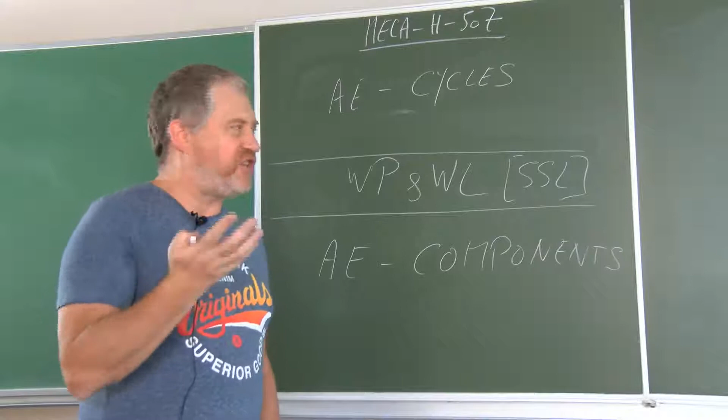That's why we can say we will discuss 3 parts, but this one will be very short, about 1 day, 1 afternoon. The other ones, globally speaking, in terms of the ratio of half days we will have: 6 about the cycles, 1 about the helicopter view, the steady state line theory, and 6 about the components.

Because I know students are quite interested by exams, marks, points - in fact it will be very similar to one afternoon: the exam. In an afternoon we have a part on theory and a part on exercises. The exam will be the same, so it will be 50-50, 1 or 2 or 3 exercises on paper that you deliver at the end.

This year I don't know exactly how it will be organized, if it will be in a room or online. You receive an exercise with some figures, some tables, some data, and you solve it and deliver your sheet at the end. This is the exercise part, over 10 points.

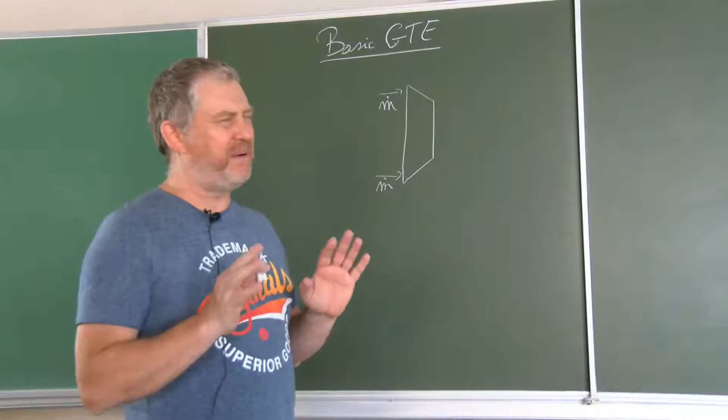Related with this pressure, temperature, and speed, there is also a mass flow rate, m dot, dm over dt, which is in kilograms per second. We will rarely speak in volumetric flow rate, because what's important is the mass. Rho will change a lot, so you know mass flow rate equals rho VA, and rho can really change a lot in an aircraft engine, in the compressor, the turbine, the combustion chamber. So we always speak in m dot, the mass flow rate.

How can you have a large energy flow? There are different ways. You can store energy using compressed air. This is certainly a solution, but how can you use that in a continuous way? This is impossible, because the tank where you are putting the compressed air would become empty very quickly. So it's not possible. The only continuous way to proceed is to have a combustion chamber.

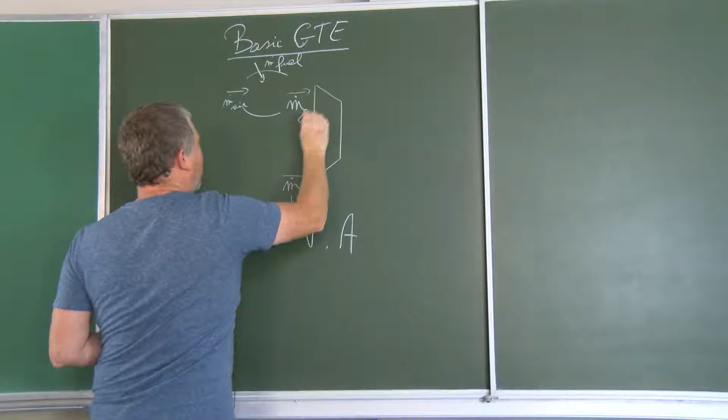Combustion chamber, I'm representing that like this. Today, we will, in the study of the components, really analyze combustion chambers. We will analyze this combustion chamber in the last detail later on. But for today, let's just represent a combustion chamber like a tube, a cylindrical tube where at the entrance we have air, so m dot air. We are injecting m dot fuel, and here we have m dot gas. Thanks to the combustion that we will have there, the temperature will increase a lot.

You hope that the total pressure will not decrease too much, so you keep a very high energy flow. The problem is, if you want to realize a combustion, burning a fuel together with air, especially in an open combustion chamber like this one, it's very different compared with an internal combustion engine. In the cylinder of an internal combustion engine, you have a very small volume, everything is closed, so it's quite easy to realize a combustion. Here, you have a flow at high speed entering and leaving, and you need to realize combustion. It's very complicated. We will see how it can be solved, but it will be a real challenge.

How can you ensure that you will have a good combustion? We will see later on what we call a good combustion. This is by having the right conditions at the entrance. You must have the adequate speed, the adequate temperature, and mainly the adequate pressure. We will reduce the speed because otherwise the flame will blow out. You have an interest in having a rather high temperature in order to have the fuel in the best condition to ignite it, maybe to vaporize it if it's a liquid fuel, but mainly you need a pressure. How can you have a pressure?

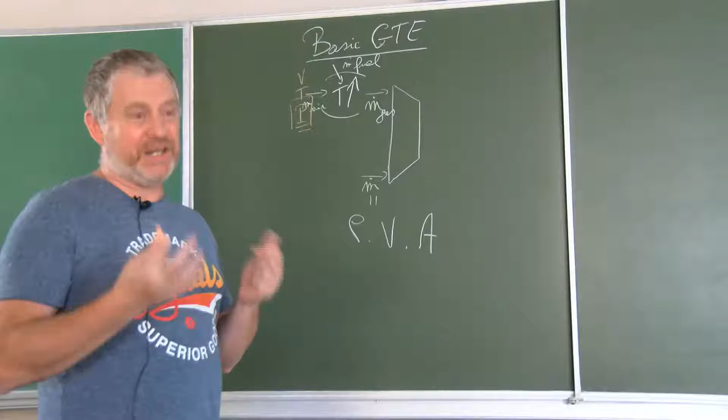Again, you could use a tank, but the tank would be empty very quickly. So you need a continuous system. How can you have a continuous system? By putting here, of course, a compressor. If you need high pressure, the best solution is to put a compressor. You will say maybe, how can you have a compressor? It's difficult. Yes, it's difficult, for sure. But this is the only solution to have a continuous system.

And how can this compressor be driven? Of course, by the turbine. I will use another color. You have in between here a shaft, of course. This shaft, the name I will very often use, is sometimes also called a spool. I will define exactly what is the difference between a shaft and a spool later on.

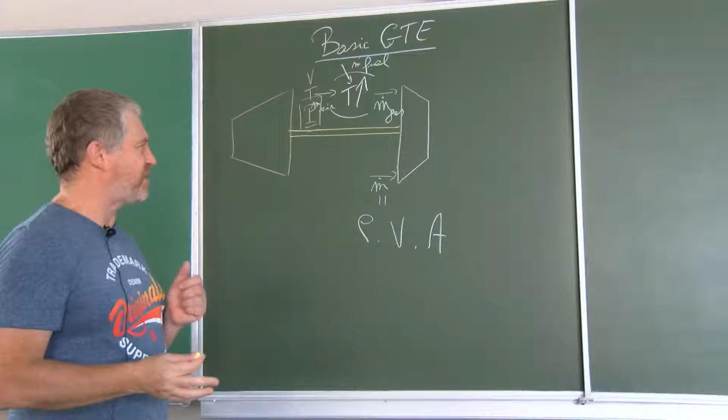So what do you have? You see how the system is working. I have a high energy flow. This high energy flow will flow into a turbine. The turbine is generating work, transformed, because at a certain distance from the shaft, into a torque. This is the torque, a very, very important parameter. People always speak in power, but this is ridiculous. We need to speak in torque, because everything starts rotating thanks to torque.

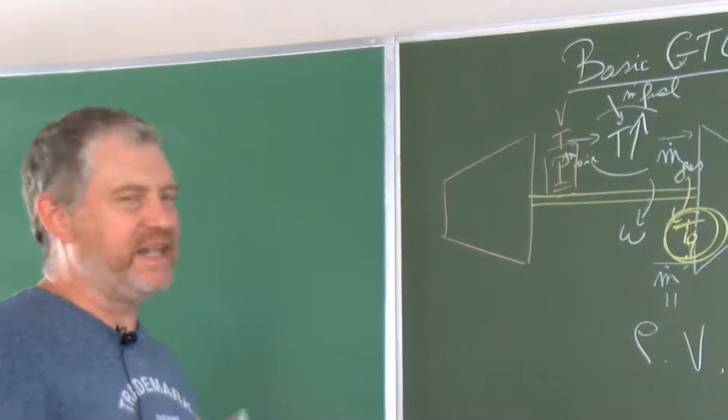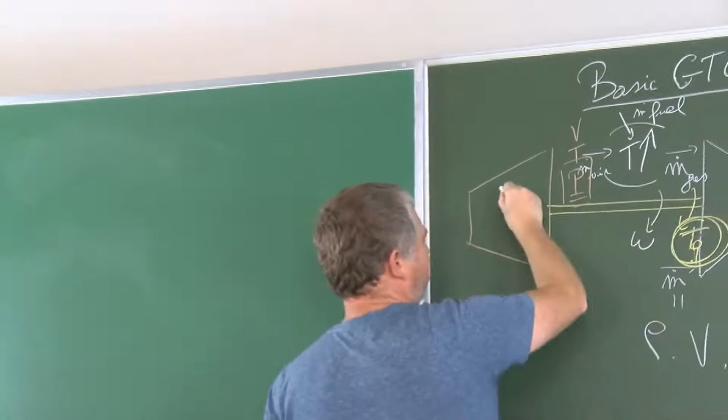By increasing the pressure, you go to the combustion chamber, you have the adequate pressure, you inject the fuel, you mix the fuel and the air, you ignite the mixture, you increase the temperature, and you see that you have this cycle: high energy, work, torque, pressure, ignition. This is a cycle going in this direction. The flow goes through the compressor, then through the combustion chamber, and then through the turbine.

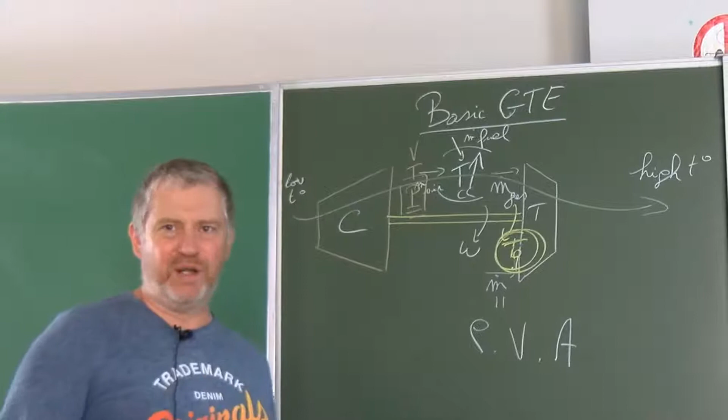Entering at low temperature, you have certainly a low temperature here, and leaving the system with a high temperature, because you will not be able to recover the full energy you have in the turbine. It depends on the system - it's not always needed to expand everything, the pressure you have in the turbine, because maybe you want high power, high work, high energy in the flow behind the turbine.

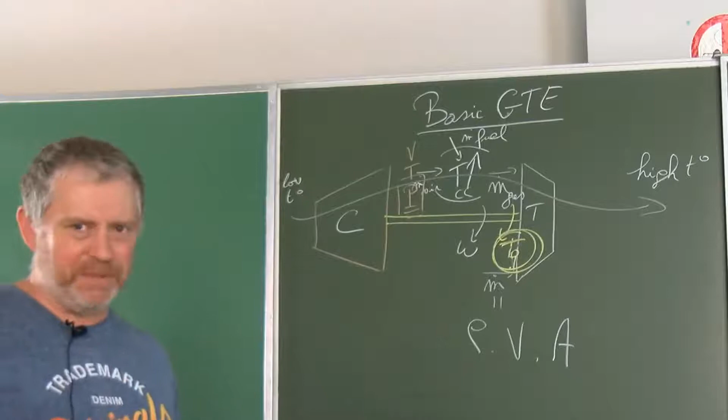And this is what we will call the basic gas turbine engine: a very simple system with a compressor, a combustion chamber, and a turbine.

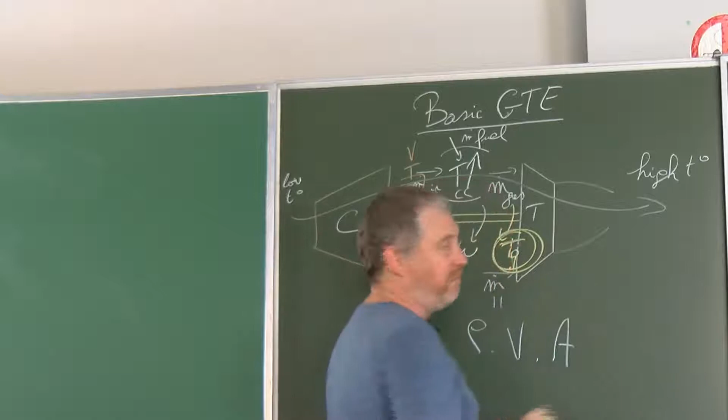Of course, you need to guide the flow to go outwards. So here you will need to put a nozzle like this, or maybe if you are in a ship, a nozzle like this, that brings the flow out of the system. But we are not putting too much importance on that because it's not looking like a mandatory system.

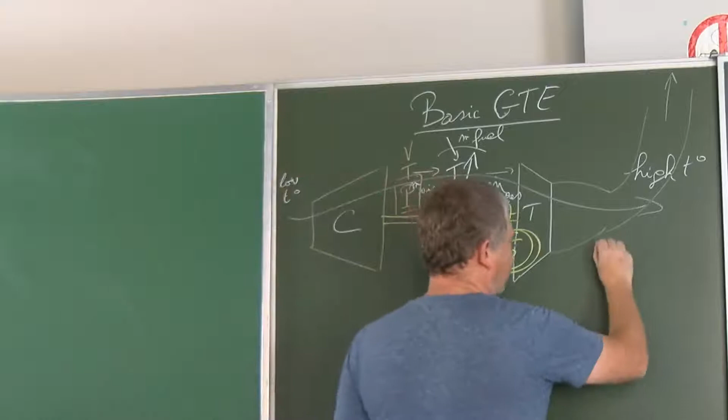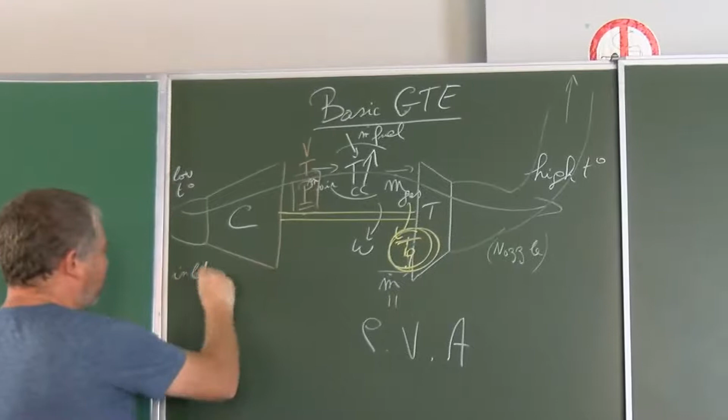And so this nozzle that we have here, in a first assumption, we do not need to take into account. Most probably, you will also need to guide the flow towards the entrance of the compressor, so you will need what we will call later on an inlet. Again, here we will not put the accent on the existence of this intake - it will be assumed not having too much importance, and we will come back later on to the influence that this inlet, this intake, can have.

And that's why we call that a basic gas turbine engine cycle, because this is the most simple cycle that we could imagine. We do not consider the inlet, we do not consider the nozzle, and we are just considering the components that are the most important, that are absolutely necessary in a gas turbine engine.

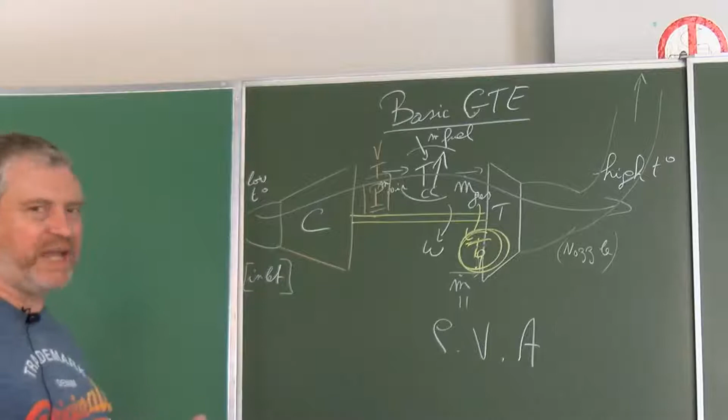Is it feasible? Is it not too large an assumption to consider that? This is certainly what you can imagine when you have a speed that is equal to 0. So when the aircraft - when the air, you can say that A, this is the air, or you can say that A, this is the aircraft.

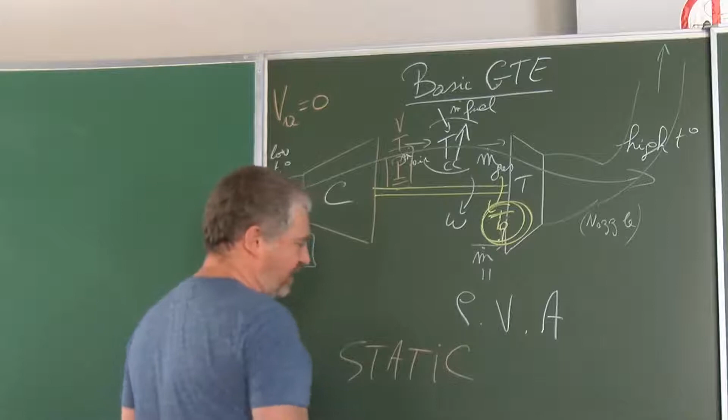When you have a static application, this is what we will use as terminology - static application, which we will very often just note as S later on - it means that the system is not moving. Maybe the system is moving at very low speed. Let's say if you take a ship, for example, cruising at 10 knots or 15 knots, you can certainly consider that this is cruising at a very low speed.

And if you are considering that you have a very low speed, we can certainly say that we do not need to consider something before the entrance of the compressor. The compressor will suck the air from the environment that is at a speed about equal to 0. And of course, when I'm speaking about A, it can also be called the ambient conditions. A can be for air, A can be for aircraft, A can be for ambient.

You will need, of course, to consider also the two other very important ambient conditions that are the temperature, TA, and the pressure, PA. Both of them are defining rho A, which is equal to PA divided by R times TA.

We could certainly also speak about the relative humidity. This is something that we could consider, but in aeronautics, we are not so often speaking about relative humidity. In terrestrial, static applications for electricity generation, we will speak about relative humidity, but in aircraft engines, not so much. Why? Because where the aircraft are flying in cruise, the relative humidity is extremely small, except when they are flying through a cloud. But in normal flying conditions, the relative humidity is very, very small when you are at 10, 11, 12, 13 kilometers altitude. And so, static conditions - keep that in mind.

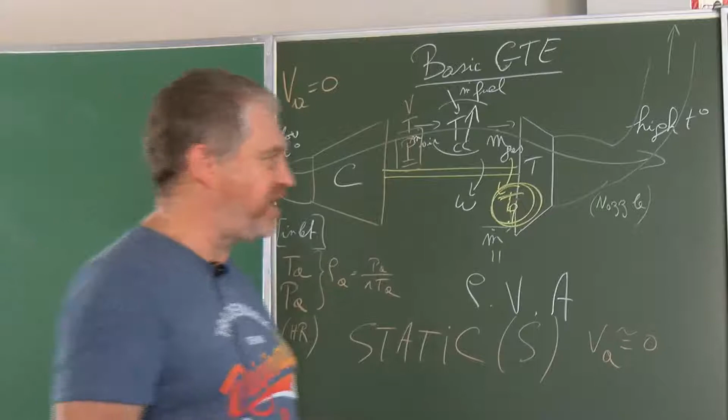There is a second assumption or simplification that we will consider when discussing the basic gas turbine engine: the total components will be considered equal to the static components. What do I mean by that? The total pressure and the static pressure will be considered as the same, and the total temperature and the static temperature will also be considered the same. Is it important?

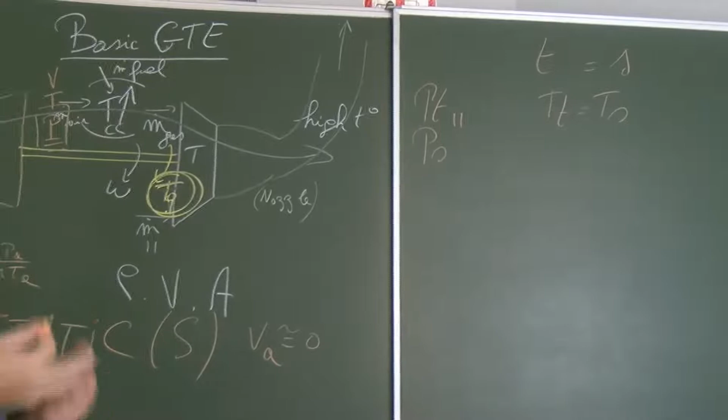Yes, because when you cannot consider that they are the same, you will need to compute the total temperature and the static temperature separately, and the total pressure and the static pressure separately. So there is indeed a difference. By considering them equal here, we are simplifying all the equations and questions we encounter when solving the different fluid situations, by saying that the total and static conditions are the same.

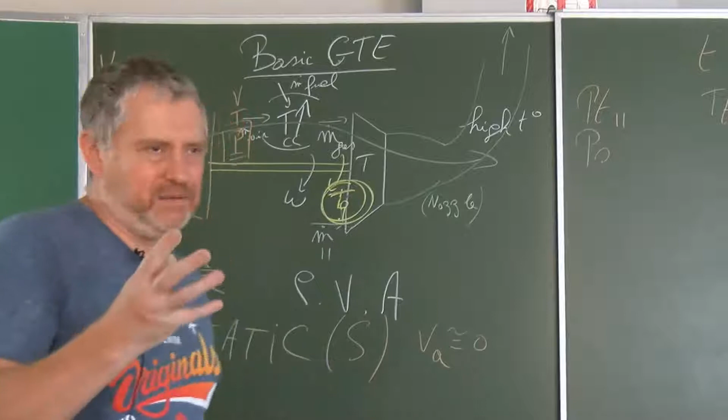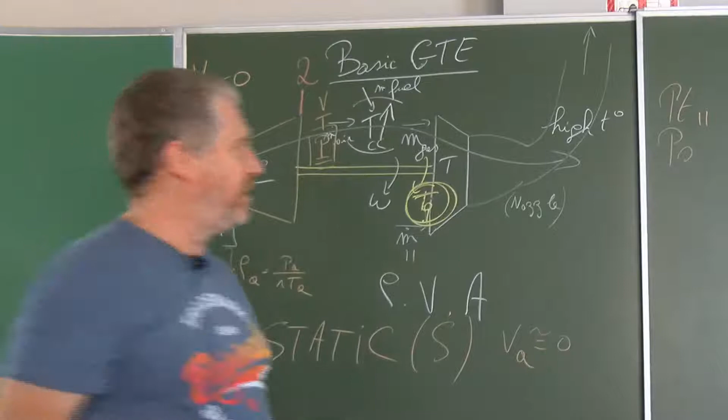Are the same where? Where are they the same? We have discussed a compressor, a combustion chamber, and a turbine. Each component is defined by an entrance and an exhaust, the exit of one component being the entrance of the next one. This is the section we will call 1. You are entering the system at section 1, and leaving at section 2. So when I write something like this, I have this.

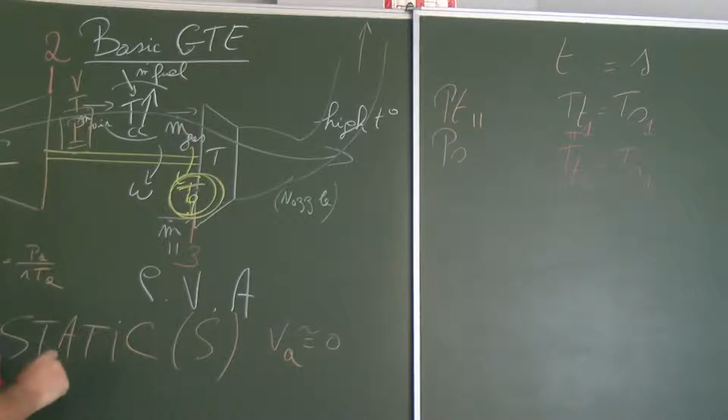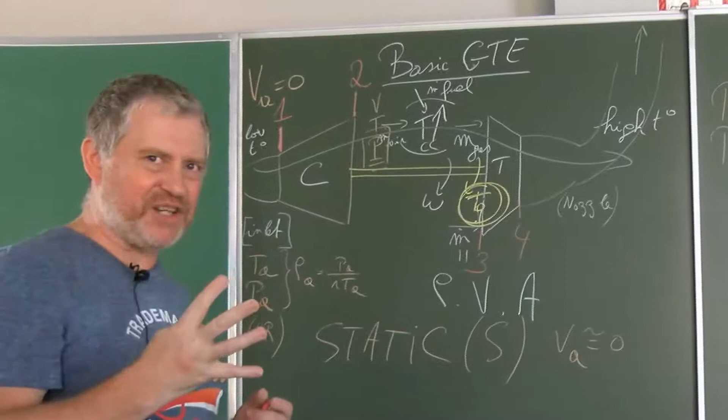I do not want to say that TT1 is equal to TT2. I just want to say that, in a given section, the static and total parameters are the same. After that, the third section is the exit of the combustion chamber or entrance of the turbine, and the fourth section is the exit of the turbine. In this basic gas turbine engine, we will have only 4 sections to compute, and in each of these sections, only 1 temperature and 1 pressure.

Compared to the cycles we will see later on, this reduces the number of parameters we need to compute by a ratio of at least 2, because of static and total being equal, but most probably 3 or even 4 times more in the cycles we will study later on.

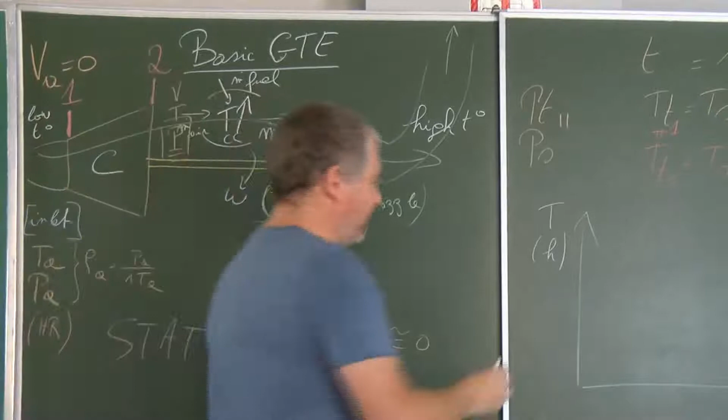Of course, you could also represent this cycle on a TS diagram, or temperature-entropy diagram, speaking in total elements since static and total elements are the same. You start from point 1, the entrance of the compressor, and by the assumptions we have considered, you can also say that point 1 is point A, because at point 1, the temperature T1 equals TA, and P1 equals PA, or better, PT1 equals PA.

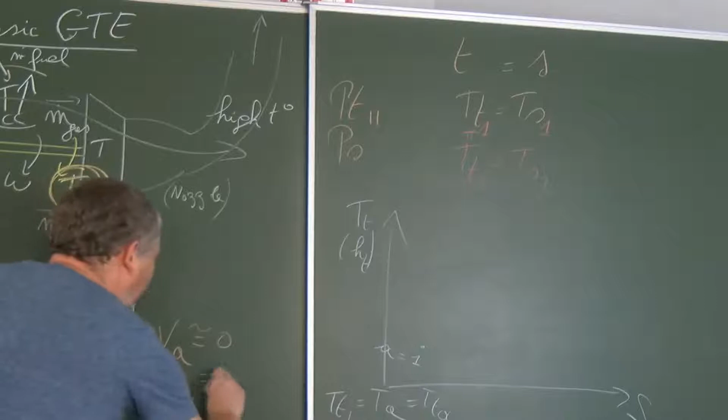So TT1 will be equal to TA, and PT1 is equal to PA. But in fact, TA is also equal to TTA, because we have said that VA is equal to 0, and PA is also equal to PTA, since VA equals 0, or the Mach number, which equals VA divided by the speed of sound, equals 0.

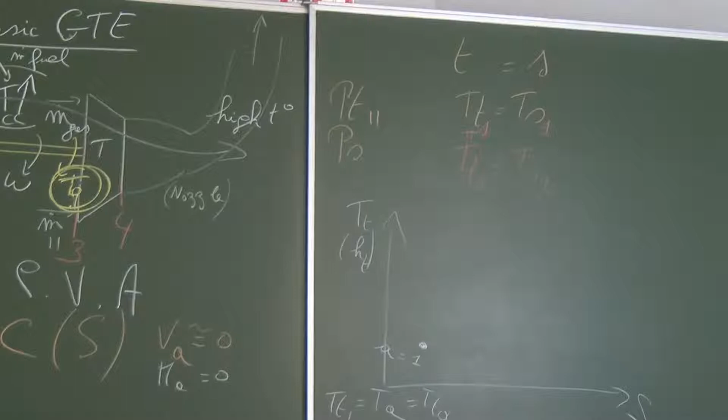By considering the different assumptions I have enumerated, we have a first point at the entrance of our compressor that is very easy to define. You just measure the outside air temperature, TA, often called OAT, the outside air temperature — this is jargon from aeronautics. This is the temperature TT1 at the entrance of your compressor, and you also get PT1 by measuring the atmospheric pressure with a barometer.

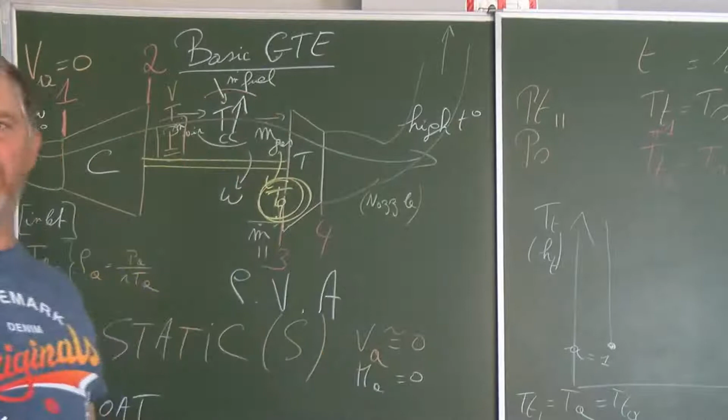If you had a nice isentropic flow, you would arrive along a vertical line at the exit of your compressor, at a total pressure PT2. How can you define that? PT2 is equal to the pressure ratio multiplied by PT1. Very easy.

Of course, we are not arriving at this pressure in an isentropic way — we are not arriving vertically at point 2i. We will arrive at point 2, that is here. We will need to see the difference between point 2 and point 2i.

After that, you are flowing inside a combustion chamber, going very high in temperature with a small pressure loss, because there are friction losses — fluid against fluid, fluid against the walls — inside the combustion chamber. So you will arrive at PT3, slightly lower than PT2. What is slightly? We will define that later on. And you reach a very high temperature, TT3, which is the highest temperature defined in a section.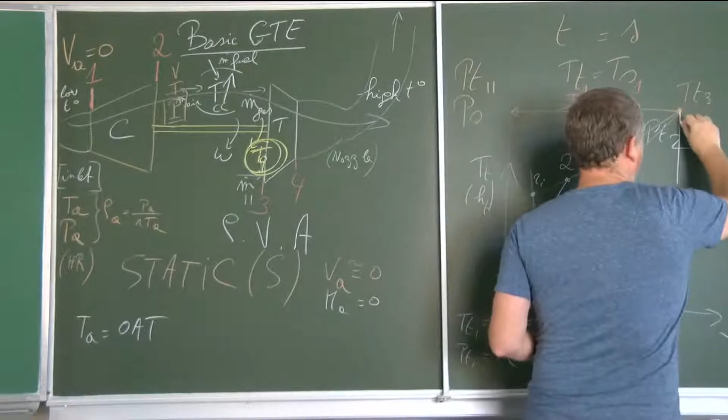So it's not the highest temperature we have in a cycle, I will discuss that later on, but in this section, this is the highest temperature. And from there, you will expand. You could expand in an isentropic way in the turbine, or you will expand in a real, non-isentropic way, with an increase of entropy like this.

And what do you need to represent? You need to represent here PA, which is also equal to PTA, which is also equal to PT1. And here you will expand.

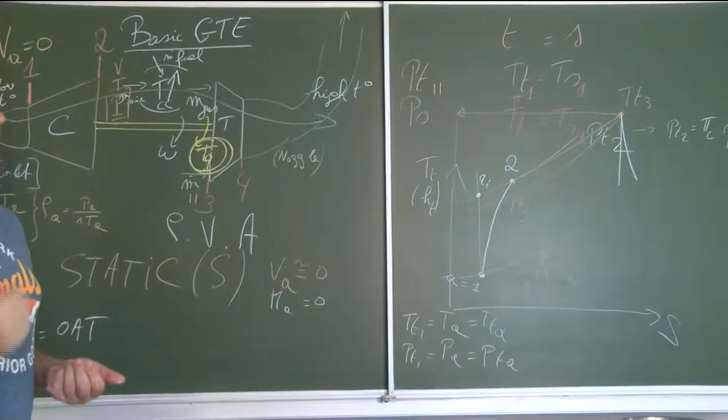You will expand down to what? So you need to look at this. If you extend the PA iso-pressure curve, you see that you can locate, you can position the exit of the turbine relative to PA. And at the exit of the turbine, you must be at least equal to PA.

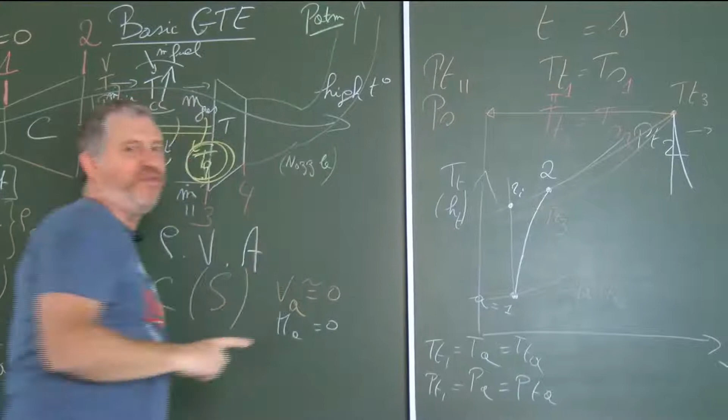Otherwise, here you have PA, the atmospheric pressure outside. You see the exit of the turbine must be at a slightly higher pressure compared to PA, otherwise the flow will never leave the system, will never leave the pipe, will never leave the exit of your turbine. So you must be higher than PA, the extension of this same isobar curve.

And so where are you arriving? It depends. So you will arrive, let's say, at a value like this, in an isentropic way or in a non-isentropic way. And what do we see? We see that if this pressure P4 is high or very high compared to PA, what do we see?

Depending on where you arrive, I will show you two cases: just slightly higher than PA, or much higher. Here P4 is just slightly higher than PA, or P4 much higher. What do you see? The higher the value of P4, the higher the value of T4.

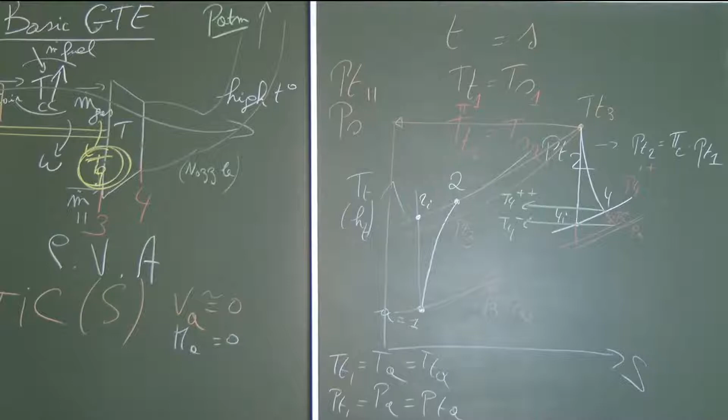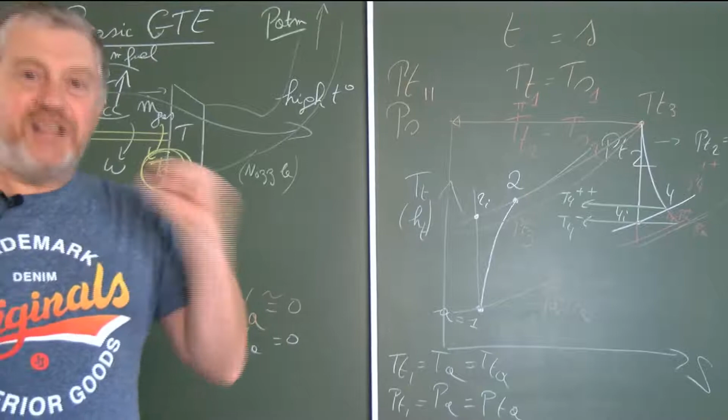You see, this is very important. If we are not able to expand the flow to the minimum pressure, so to have the largest expansion of the flow, what will be the result? You have a higher temperature. Is it good? Not good? It's not good, of course, because your cycle is intended to do what?

Your cycle is intended to drive the compressor and to give energy here, but not energy under the form of temperature, because your system doesn't need to warm up the atmosphere. So this is not a good solution to have point 4 at this position. You must have point 4 at the lowest possible position compared to atmospheric pressure. That means just slightly higher. This is something you need to keep in mind.

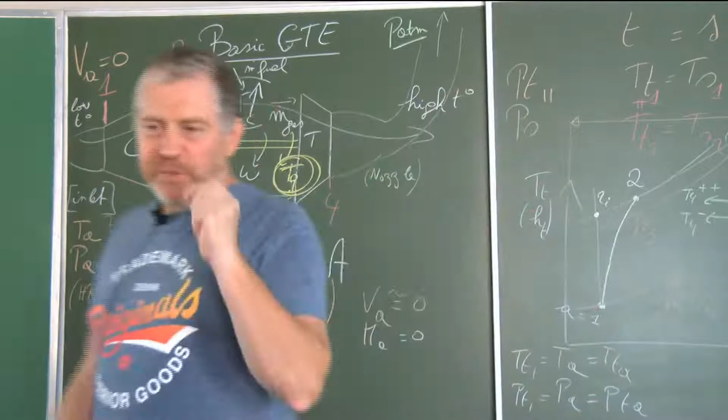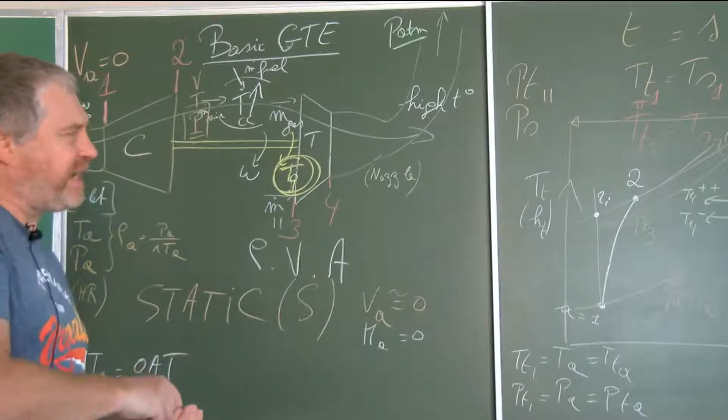Okay? Of course, we can also think about what the cycle is exactly doing. So you can have a large energy here, and you will use this flow to do something, I don't know what can be the objective. Another solution is to say, I will have here a very low energy flow, and to expand more in my turbine. I expand more in my turbine. And what do I do with that?

I have more power here. The power generated by my turbine is higher than the power needed by the compressor. And if I have a surplus of efficiency, of energy, of power, what will I do? I will drive a load here. And you see that this basic gas turbine cycle can be used, let's say, in aeronautical application with high energy, and you will do something with this flow.

Or it can be used in non-aeronautical applications with very low energy here behind, just enough to leave the system. But if you have low energy there, and if the energy was the same here, you extend the turbine and you drive a load that is here. And so you see that this cycle is also a cycle to generate, let's say, work on a load.

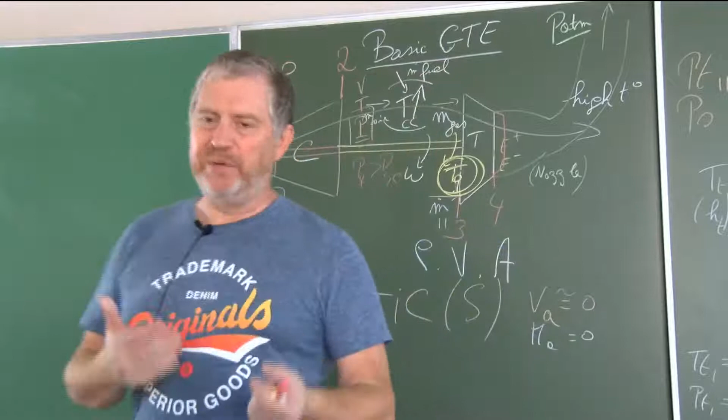It's a cycle that can drive a load. What type of load? Very often we speak about an electric generator, and so this cycle is also the cycle used to generate electricity. You have already heard that a few times when we speak today about nuclear power stations, the fact that we do not have enough electricity at some moments during the winter. Some people say it's not a problem, we will switch on the combined cycles. In fact, these combined cycles are based on a gas turbine in the middle of the system, it's a bit more complex than that, and this gas turbine is just driving an electricity generator in order to produce electricity for the grid.

So in this first lesson, and also a bit tomorrow, I'm speaking not so much about aero engines. I'm speaking about something that is the basis of an aero engine, but that is also the basis of electricity generation, and this is the gas turbine engine.

Of course, the load can be something else here. It can be an electric generator, it can be the wheels of a car, it can be the wheels of a tank, it can be something to drive the propeller of a ship, it can also be the rotor of a helicopter. There are so many applications, but always with this very basic gas turbine engine.

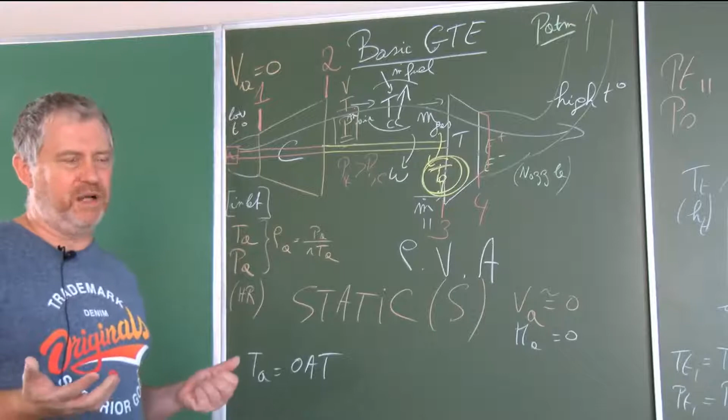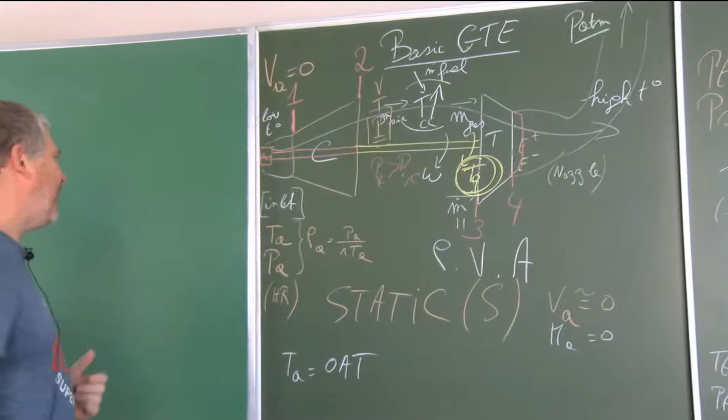And it looks extremely simple, of course, and so attractive, but the system is very complex to build and to define. Why is this? Because in order to exist, in order to have this cycle, you need to have that the PIT is at least equal to the PIC. So the power generated by the turbine must be at least equal to the power absorbed by the compressor. And this is very complicated.

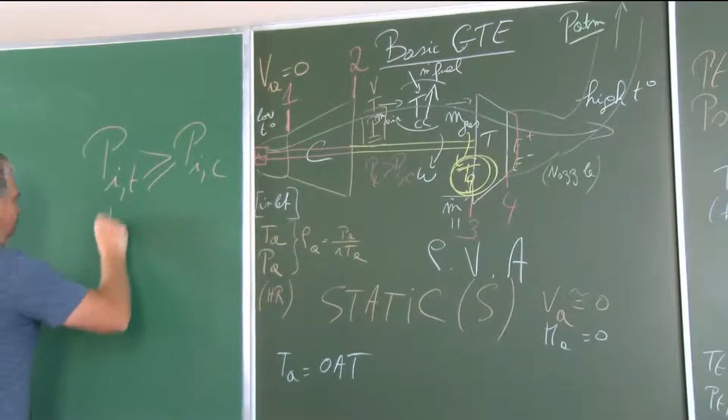In order to have this, you need two things. You need to have a TT3 that is extremely high, so the temperature there must be extremely high. This is what makes the power delivered on the shaft of the turbine increase. And this is extremely complex because it requires very advanced materials or technology to be able to work at these high temperatures, at least something like 1000 Celsius order of magnitude, to have an easy order of magnitude in mind.

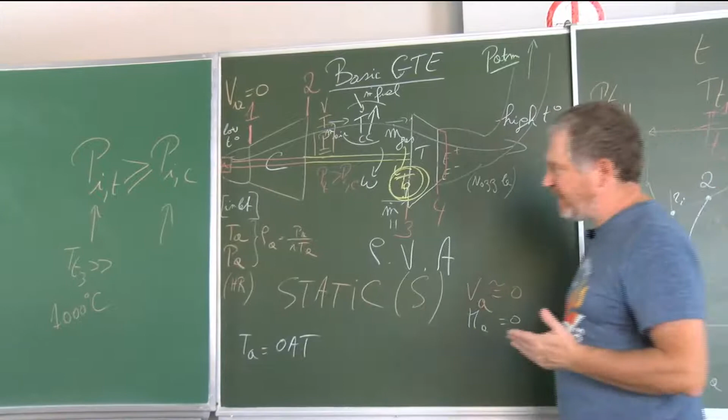But the second thing is that the PIC cannot become too large. And in order to have a rather moderate, not too large power absorbed by the compressor, you need to have an isentropic efficiency of the compressor that is high. That means you must be able to have the adequate shape of the components in the compressor, of the blades, of the vanes. You must have a good material, a good finish of the surface, the roughness of the surface, and all clearances, all gaps between the rotating parts and the non-rotating parts must be small, etc.

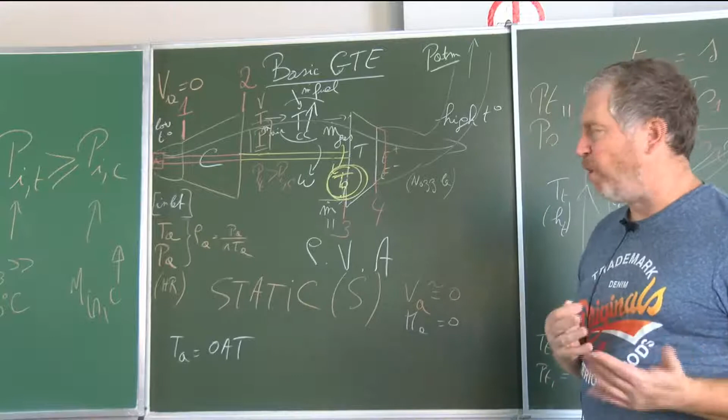And these are two challenges from a technological point of view. It took years and years and years for engineers to improve the turbines from a thermal and mechanical point of view, and to improve the compressors from an efficiency and geometry point of view.

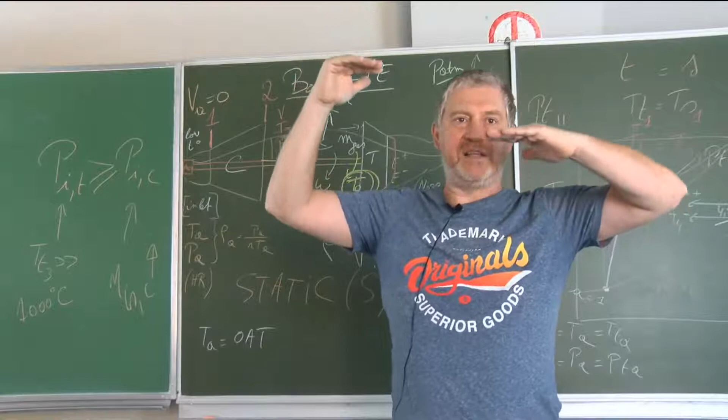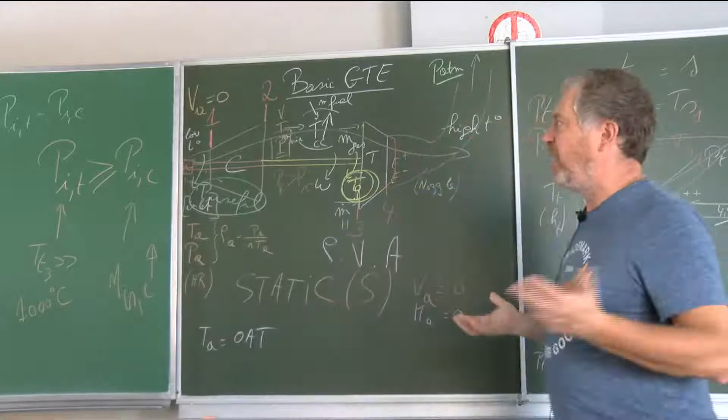Gradually, the PIT, which was much too low compared to the PIC, the difference decreased, and at a certain moment it was the same. So then you have a cycle delivering no useful power, and at a certain moment you have this unbalance, and at this moment you have what we need, a useful power at the exit. So the difference between PIT and PIC, this is the useful power which the cycle is delivering. And this is not easy at all. It took a long time for engineers to be able to have this positive unbalance between PIT and PIC.

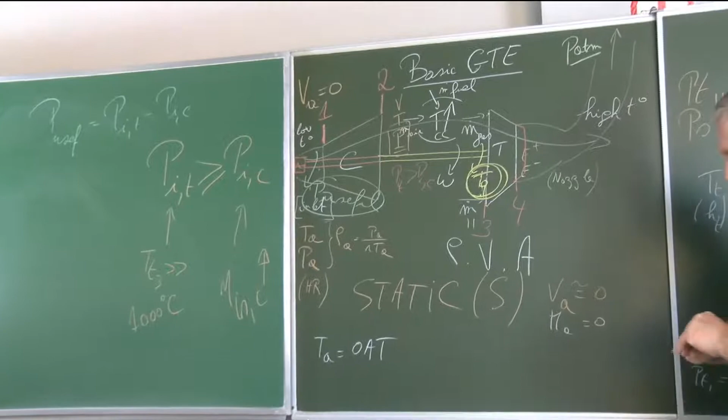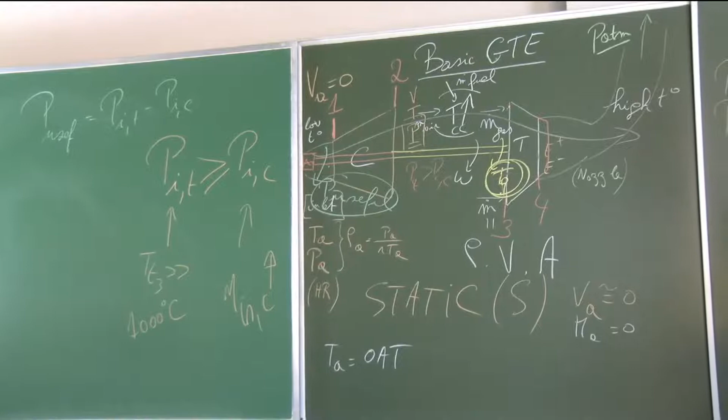Also, we must certainly speak about the reason why the engineers and the stakeholders have spent so much time to reach this positive unbalance. Because you could say, okay, if it's so difficult, then we stop and come back to that within a century when it will be easier to solve. No, there is such a large interest, such a large attractivity in gas turbine engines that they have tried and tried and tried.

And what is the so large interest that you have in gas turbine engines? This is the fact that the system is almost frictionless from a point of view of metal against metal. So in a gas turbine engine, you have friction between air or gas or fuel with metal.

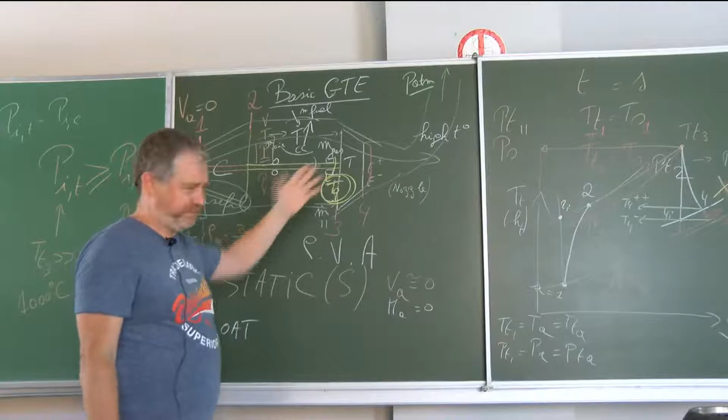But there is almost no contact metal against metal. That means that the wear in a gas turbine engine, in the engine that we have defined, is almost zero. You have an external carter here, one there, and it makes the link, but there is almost no mechanical contact metal against metal. The only place where you have contact is in the bearings. You have bearings supporting the shaft, let's say a ball bearing to take axial loads and radial loads, and cylinder bearings to take the radial loads.

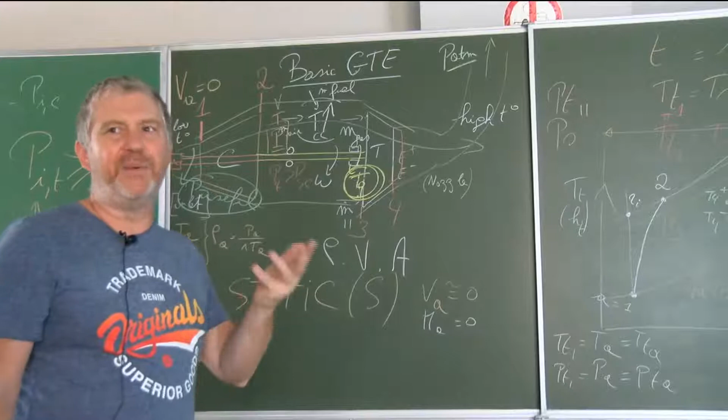So this bearing with the shaft, or this cylinder bearing, there are 10, 12, 11, I don't know how many cylinders. Each of them will be in touch with the inner ring of the bearing and the outer ring of the bearing, the inner ring being the shaft, and the outer ring is here. This is the only place where you have metal against metal.

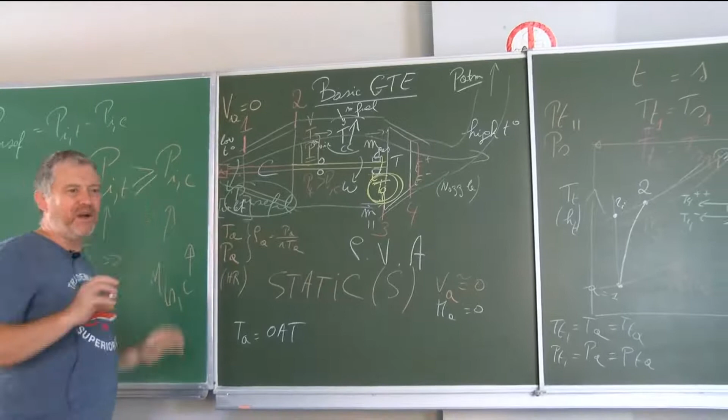So, a priori, why have they tried so much to solve this problem that was extremely difficult to solve? Because, a priori, gas turbine engines have an infinite life, we could say. Maybe we can say very, very long life. This is on the contrary compared with internal combustion engines, where you have the piston frictioning, gliding inside the cylinder, and where you have a lot of contact, metal against metal, along the crankshaft and so on.

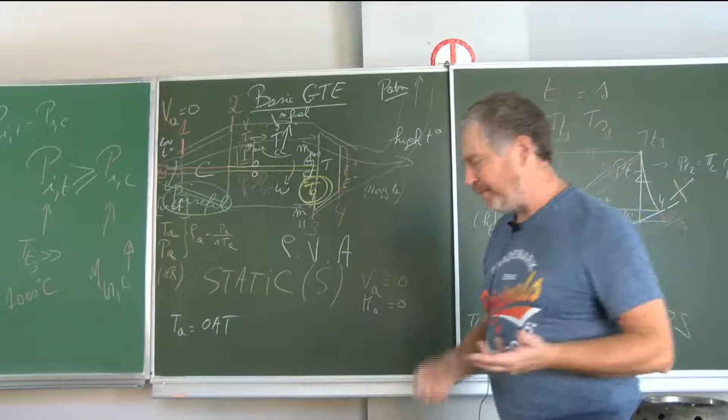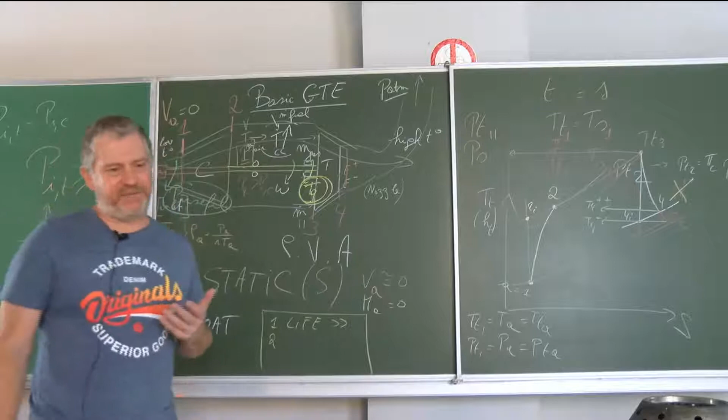Now there is something else that is attractive in gas turbine engines. The first one is the extremely long life, but there is a second very attractive feature: this is the power to mass ratio. This is the engine with the largest power to mass ratio, meaning the largest specific power, as it is sometimes called. So the specific power is the power to mass ratio.

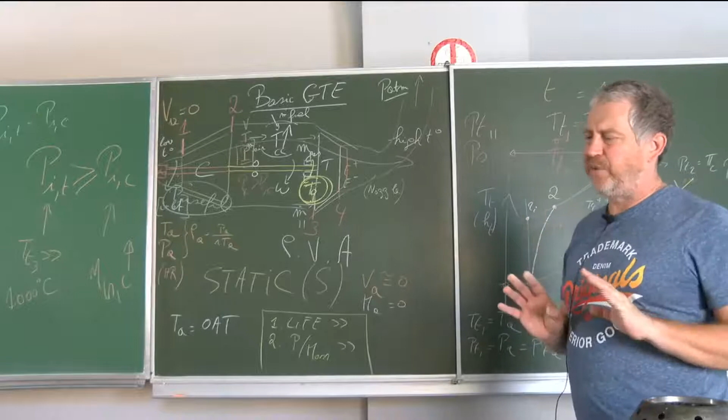I will define that later on. But I mean, if you have 1 kilo of material, this is the engine that will give you the largest power available. Or for a given power, because this is very often the power that we consider as a constant, it will be the lightest engine. So this is something you need to keep in mind.

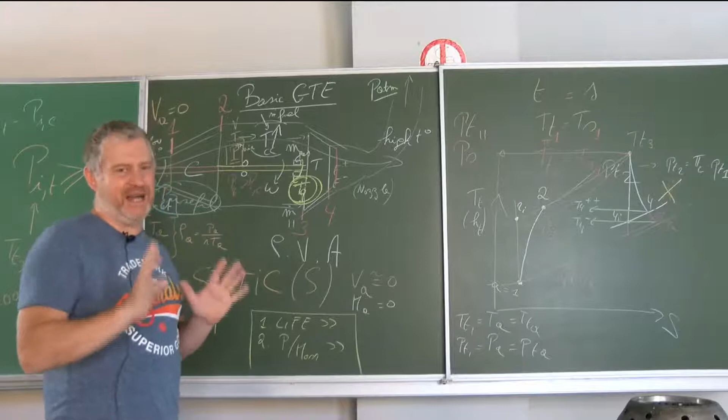Aircraft engines are a technology that is very, very light. The power to mass ratio, what later we will call the specific power, which is not the power to mass ratio but is closely related, is very high. We will come back on a clear definition of that, but these are the very attractive points: almost infinite life and a very light system.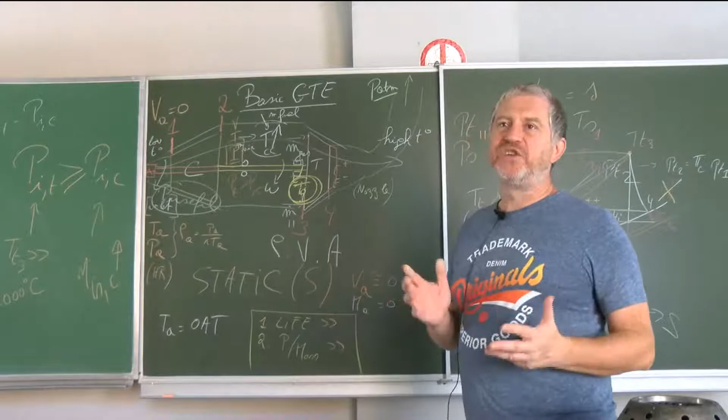And if you speak about this for electricity generation, weight is not so important, because this is a static application. But as soon as you put the system in a driving body, for example an aircraft, then mass, so weight, is becoming extremely important.

Now, what will we need to compute? We will always do something very similar. So here, this is the first cycle that we are studying, and we will define other cycles later on: the turboshaft, the turbojet, the turbofan, the turboprop, the turbofan with afterburning, etc. These are all different cycles, but for each of these cycles, we will always try to follow the same path in the explanation and understanding of the cycle.

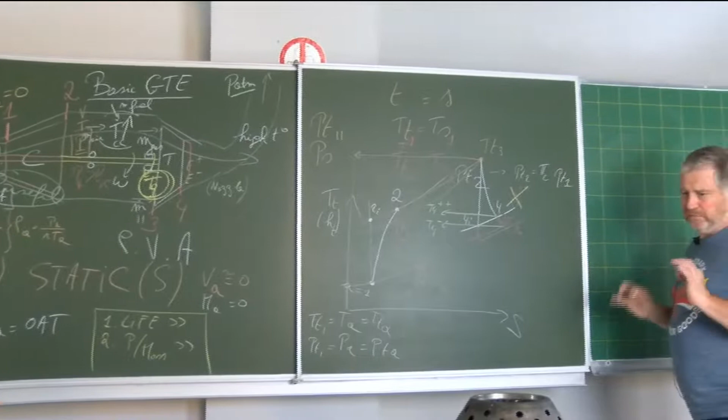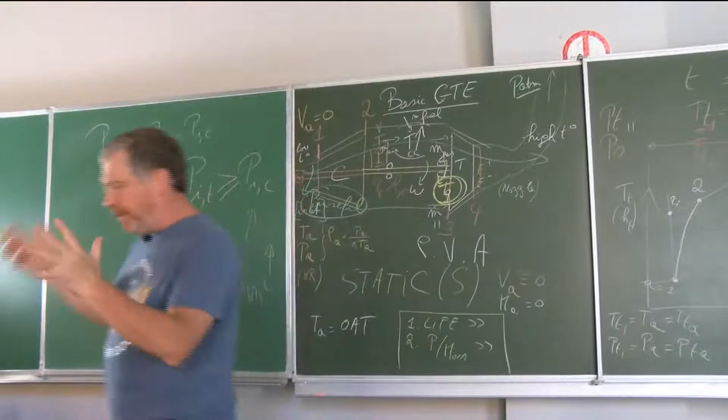What will we do? We will take an existing engine. So let's take this engine, for example. You see this engine, this is an existing engine. So you take your measuring systems, you measure all sizes, all pressures, temperatures, mass flow rates, everything that is existing inside. You have a sheet of paper and you can see all details of this engine.

And I ask you to compute this engine: all pressures, all temperatures, all power, all energies, all consumptions, I don't know what else you can imagine, all kinetic energies, everything that you could imagine. So this is what I call an on-design computation. I compute one working point of the engine.

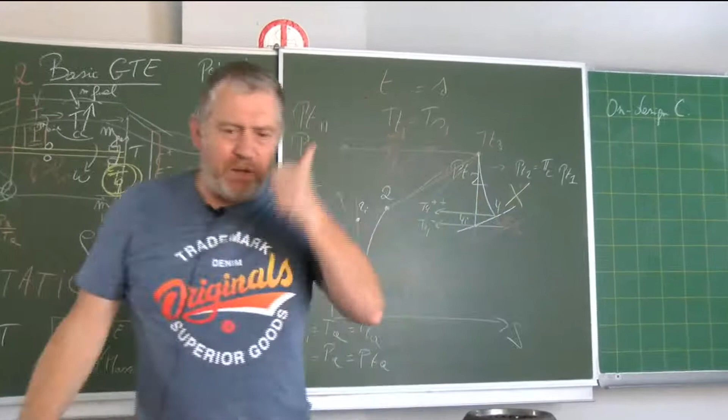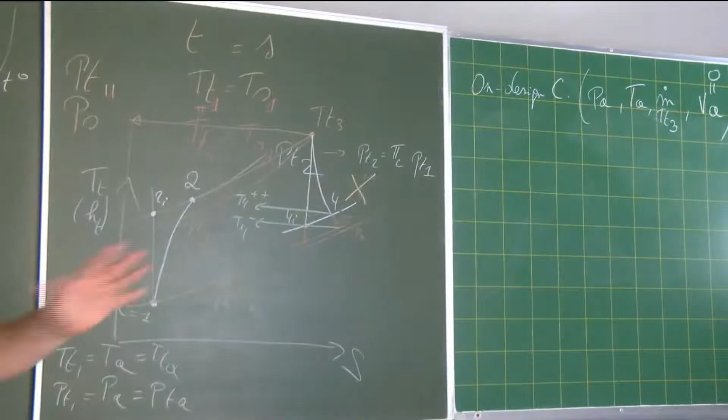I take a certain PA, a certain TA, and a certain m dot, for example. Or, if you want, a certain TIT—sorry, I have not yet defined that—the TT3, and you compute based on all the data you have, the cycle, okay? And of course, we are in a situation where VA is equal to 0. So I give you the engine that I've shown there, all the data, everything, you have everything. So you know the combustion chamber, you know everything.

And you decide, you go outside today, you measure PA, you measure TA, VA is fixed, and you start the engine, and you go to the working point that I have given you in the data sheet, and you measure the things, and you can compute the cycle. So this is what I call on-design computation. This is computation of one working point.

And that will help us to understand. So what are we doing? What are the equations? What are the performance? Can I compute P useful here, for example? Can I compute m dot fuel that I need in order to reach the TT3 that I have there?

Okay, it will help us to understand. And then we will have a second step. Step number two, it will be in order to understand how I could optimize the cycle. So I have all equations, I have all performance, I know how to compute the system. The question is now, how can I optimize the system so that, for example, P useful is maximum? Or I don't know what is minimum, I don't know what can be the objective. Let's say, in order that the efficiency of the engine is increasing. So this is an optimization problem.

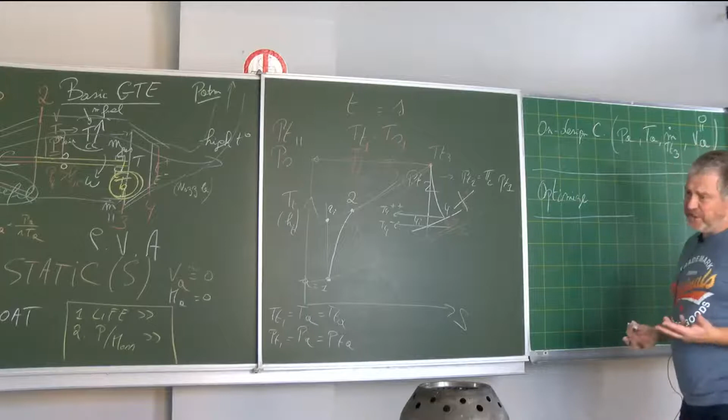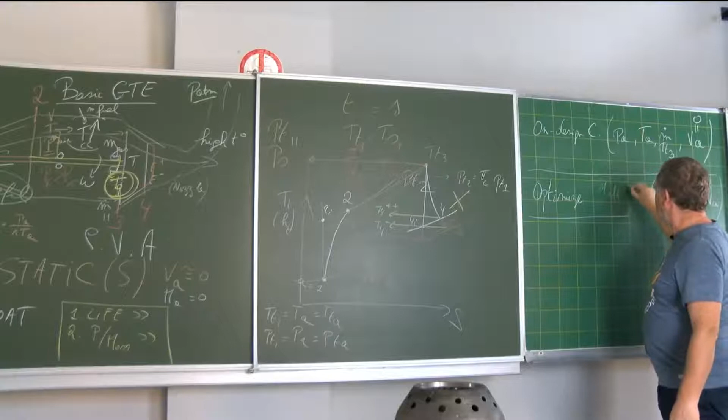And the optimization problem is, of course, still at a certain PA, TA, m dot, and VA is equal to 0. And I will try to see what I can change in this cycle in order to have a parameter that is better, efficiency higher, for example. Of course, I cannot explain today what I will try to optimize because I have not yet defined the cycle. And that will help us, for example, to have the efficiency that is maximum. Because everybody can understand an efficiency. We don't know which efficiency, but everybody knows, okay, there is certainly an efficiency I can define.

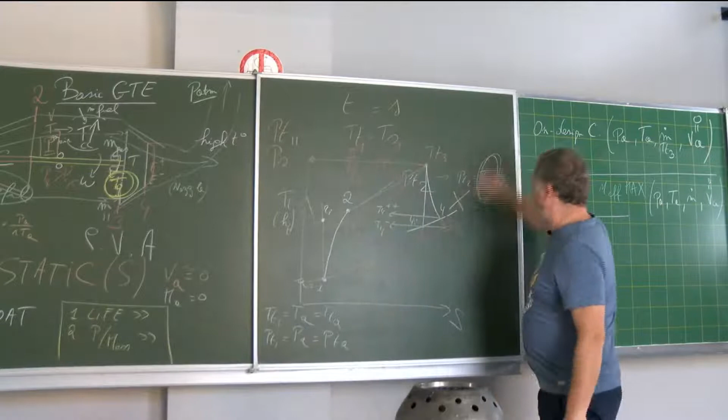Let's try to have this efficiency maximum. And for example, it will be, because there are not so many parameters in the cycle that I have defined. What are the parameters that I have defined? This is a parameter, and this is a parameter. The rest, I don't have any other parameter. This is the atmosphere. And so you see that if you change this one, you will change the position here.

Okay, you may say that you have also the isentropic efficiency of the compressor, but this is technology. It's not a thermodynamic parameter. And you will say also, the loss that you have there, it's also technology. So you see there are only two parameters. This is TT3 and the pressure ratio. And so the optimization problem, it will be to define how do you need to select the pressure ratio and the TT3 in order to optimize what we have not yet defined, but the efficiency.

And after that, what will you do? You will define what is in fact your design point. Because you have made an optimization, so you know what is your best point. And this best point, you call it the design point. It's a bit strange because there we have called that on-design. We can call that working point computation if you want. This is because it was the only point that we had. But now you can fix the design point.

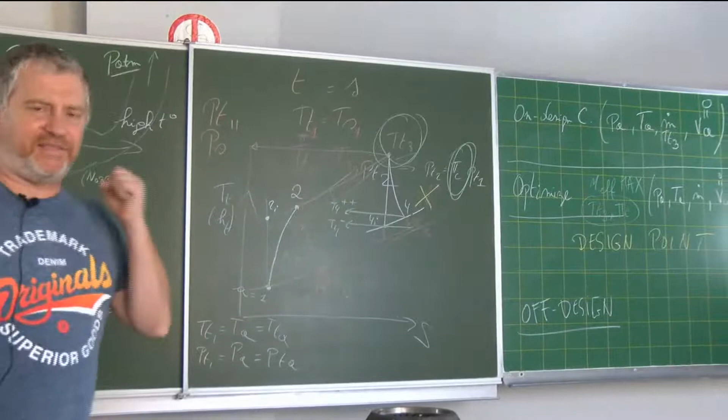And what will you do afterwards? You will do the most important - I repeat, the most important - thing that we need to do with aircraft engines. This is to study off-design. Why do I say that this is the most important part? This is because there are so many parameters changing in an aircraft engine, let's say life or operation, that you will be 99.9% of the time in off-design. And so you need absolutely to control this off-design working of the engine.

You need to know if when you go in off-design, you are not degrading too much what you have optimized. And what will be the off-design things that you have already to check in our basic gas turbine engine? Influence of PA, because we have always considered that it was this PA that we have today outside. But if we are in the summer with a higher PA, if we go with this engine in the Alps, in the mountains, I don't know, PA will change. Also, the same with TA. Maybe also, I come back to that, to a parameter that I have a bit neglected, the relative humidity. It can be something that is also important, even if we are not discussing that so much in aircraft engines.

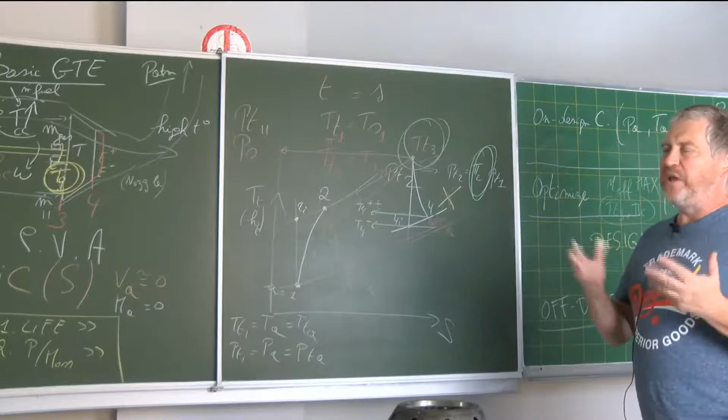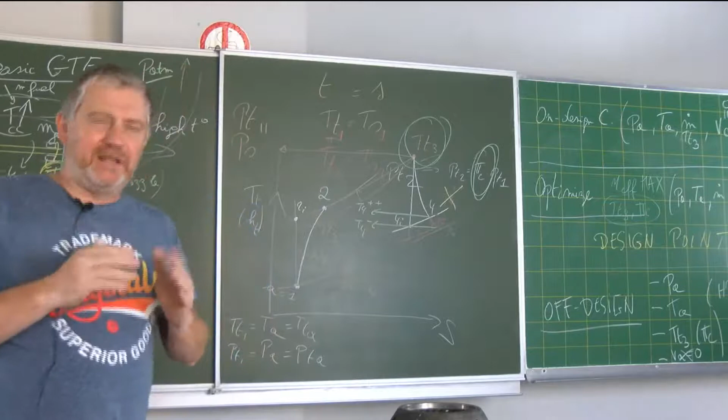In all cycles that we will study, it will always be the same rationale, of course more and more complex as you increase the complexity of the cycle. But always try to compute one working point, understand how this engine must be calculated, what this engine is doing, how can you define the performance parameters. Second step: I have defined the performance parameters, how can I improve one, two, three or four of these performance parameters.

This is the optimization problem, and it helps you define your best operating point that you can call the design point. After that, you go to the most important point, which is off-design computation. In fact, you could say almost that the design point is not so important, because we will be 99% of the time outside of the design point, outside of the design operations. So this design point is not so important.

And indeed, this is true, because very often for an aero engine, yes, there are people who know what is the design point, the engineers who made the very first design, but it's something that has disappeared. Nobody knows anymore, because it's not so important.

In fact, it is important somewhere, because you don't know exactly where is this design point, but the selection of the design point must be in some direction so that you will not change too much the performance off-design. If you select a bad design point, the off-design performance will be too bad. But the precise place, definition of the design point, is not so important. It's there around, but not critically important.

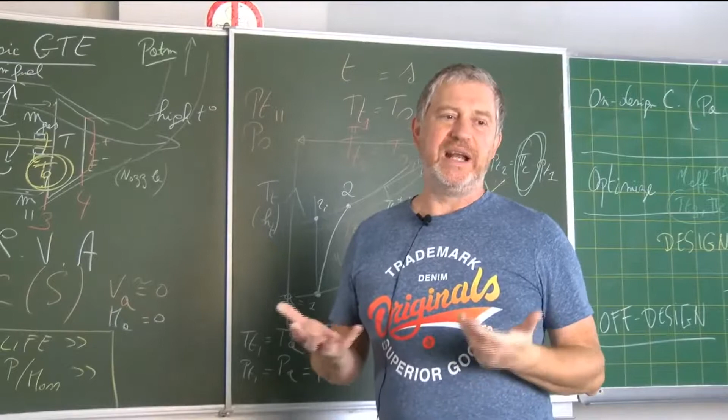And this basic gas turbine engine, as I said, is also the basis of gas turbine engines that are used to produce electricity for the grid at some moments of the day or some moments of the year, on top of the nuclear power stations. You have a lot of these gas turbine engines in industry, especially in Flanders, where industry has gas turbine engines inside their walls to produce their own electricity, and then they sell the surplus of electricity to the grid. And this is a basic gas turbine engine as the one that I have described.

See, another advantage of the gas turbine engine that I have not mentioned, a third one here, is that it is very quick to start. This is a system that can be started very, very quickly, and this is certainly a huge advantage if at a certain moment I need electricity - you start the system, and a few tens of seconds later, you are already putting electricity on the grid. This is due to the fact that we have low friction, because we can start the system almost instantaneously, thanks to the very low friction metal to metal.